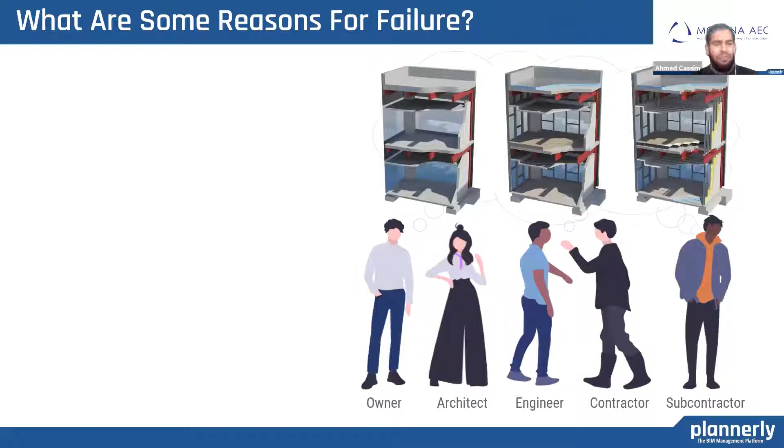So what are the reasons for these failures? Sometimes we don't have the right team. Expectations not aligned, bad communication before and during the project, deliverables not what we had expected, no quality checks, and then did not verify deliverables. So deliverables are not used - quite a few there.

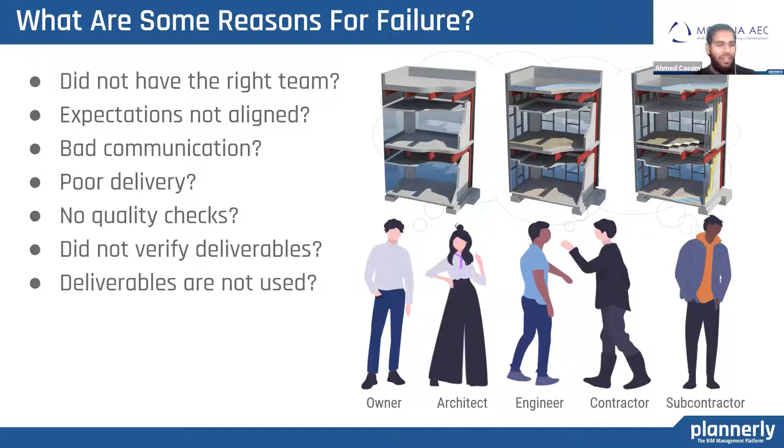So why is it difficult to align those expectations? Well, the first thing is we see a lot of bad communication. Here, firstly, is a poorly defined scope, just a one-liner, where we see just a request for some LOD and maybe COBie data. The second one is where we have the milestones, and the LOD is progressed through these milestones.

So milestone 1 is LOD 100, and then milestone 2, LOD 200 is expected, etc. And it just doesn't work like that on a project, and it should not be implemented. This is bad communication and should not be requested in this way.

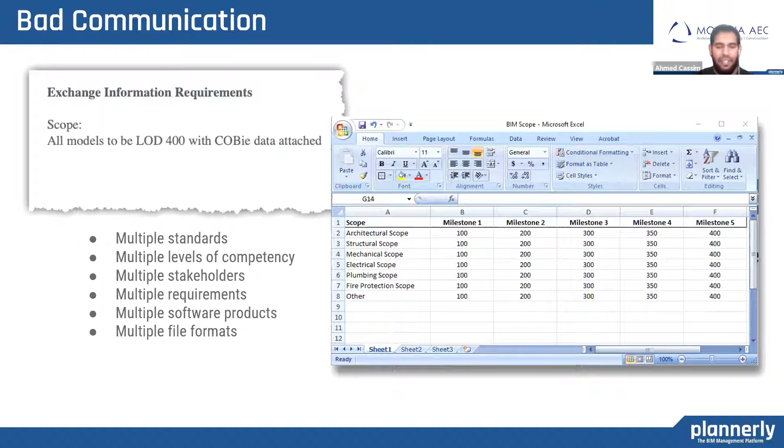There are so many variables that we need to consider, and a lot of standards out there are trying to fit all these - the level of geometry, the level of information, what elements to consider - into only a few categories. There's too many to simply categorize into just a number or a category.

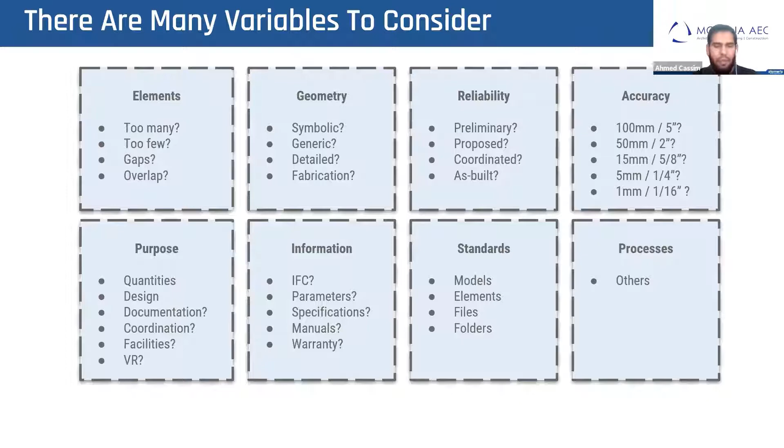And if you do get that all defined, people are so eager to start that they're just like ready, set, go. But unfortunately, without proper planning and without properly sequencing those events, you will end up with a bottleneck - you may have a lot of deliverables that need review, or a lot of issues at once that you need to resolve at the same time, and that gets very tricky.

And without proper quality assurance processes aligned, and without the correct tools to support it, we could be wasting a lot of time going through element by element, making sure they meet the initial requirements that we had agreed on. So this has two sides.

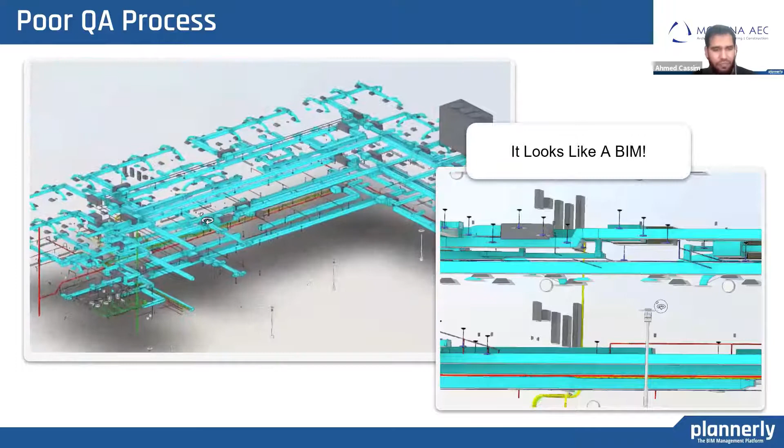It's not only the people creating the models, it's the people requesting models too. Are they both competent in their respective roles?

So it's very important to know the competency level of your company. Do you just know about BIM, or do you do BIM? Or are you an expert in BIM? Knowing where your company fits will assist you to not overcommit to something that might put the company in potential risk.

There are some great competency frameworks out there, and some great foundations to build from on your own. So we have competency questionnaires that people send out, where you can also have a mission statement, which is great - whether it incorporates BIM and whether it incorporates lean. This is where you can get a real understanding of what the company is about to achieve.

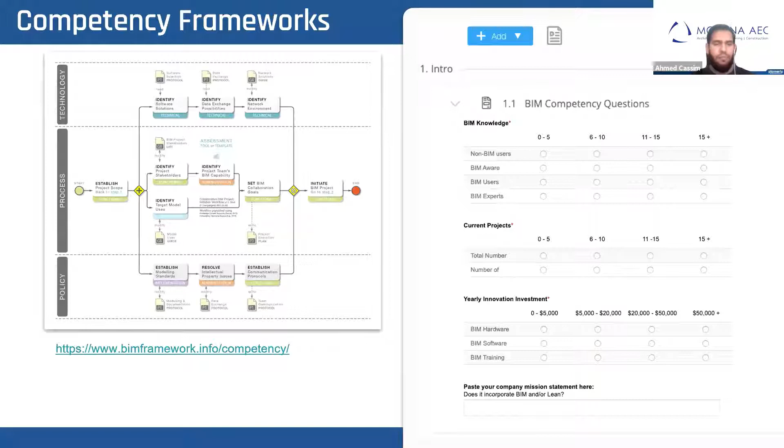Now let's look at what motivates teams for doing BIM. So each team has a different motivation for BIM. For owners - as an owner, I might have read about BIM online.

I might want to use it in my design reviews or to communicate with the public about what's going on. I might want to sell a property and market that through VR to someone in another country, or I might want to sell an apartment. I want to save cost in construction, or even to optimize facilities operations.

Alrighty, so then there's the architects. They want to win more business.

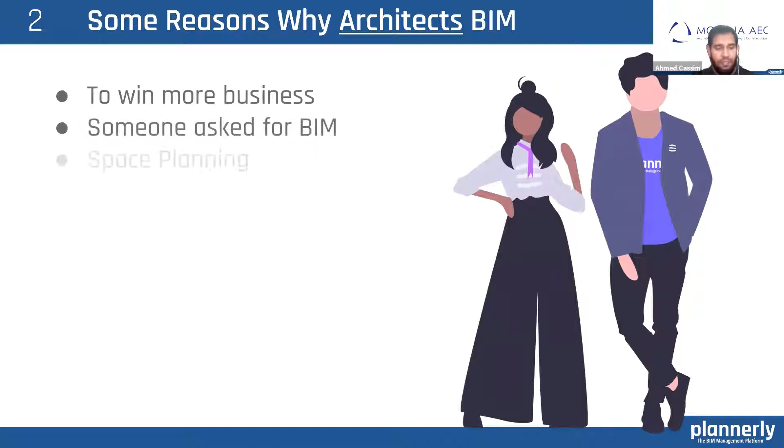Sometimes it's just because someone asked for BIM. They're going to do it for space planning, for design reviews using AR, VR between them and the client, design coordination, workflow efficiencies for construction documents. Like if there are apartment models that you can copy over, or you want to reuse that project, modeling a plan and splitting it with a section is much quicker than having to draw that section in 2D all over again. So the contractor might want to win more business.

Someone like the owner asked for BIM. It might be for coordination to reduce risk in the construction process, for quantities and estimates, 4D simulations, safety and phase planning. These are reasons why the contractor might be motivated to do BIM on a project.

As for the engineers, again, to win more business, or someone had asked. They too are part of the design coordination, but also for internal system analysis and for bill of materials, or they have a fabrication team on site and to track change orders.

And then we have these service providers. Someone asked for BIM and needs support on it. Well, the service providers are there to fill in the gaps within the scope. And maybe there's a need to accelerate the team's capabilities. The aim for these service providers is to improve our industry more rapidly.

So there's a lot of reasons around all of those. But in summary, it's when someone asks you to do BIM or to win business. And what gets us excited is when someone does BIM on a project to gain specific efficiencies in their workflow. Like for the architects, it's cutting sections into drawings more quickly, or doing something in 2D, but because you're using BIM, it updates in 3D, so everything else updates. For the contractors, it's for getting quantities or for estimating. All of those are key motivations.

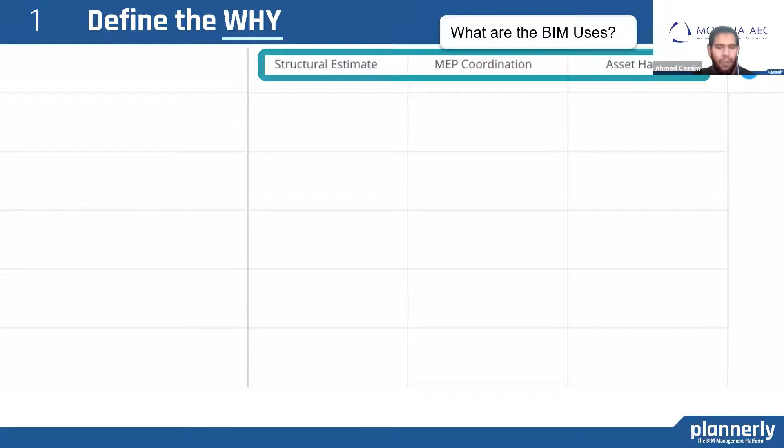Now, let's talk about the simple steps to take in order to get the right BIM. Of course, we need to define the why. Why are we doing BIM in the first place? What is the purpose? This will help us set up those major milestones in the project, which we can then define with scope, which is the what, the list of items. And then how much is required.

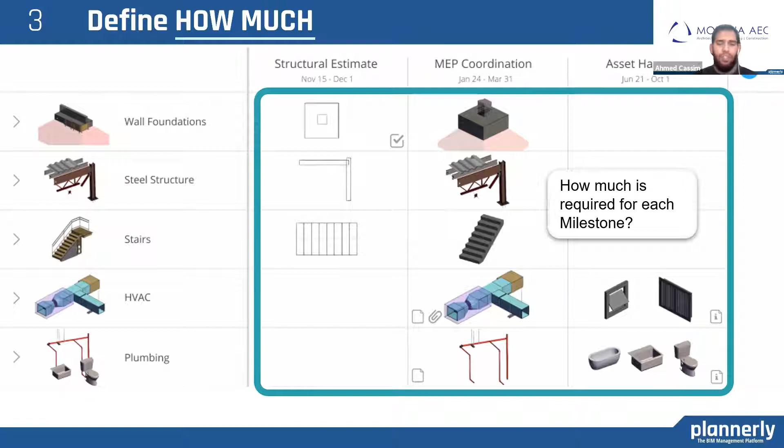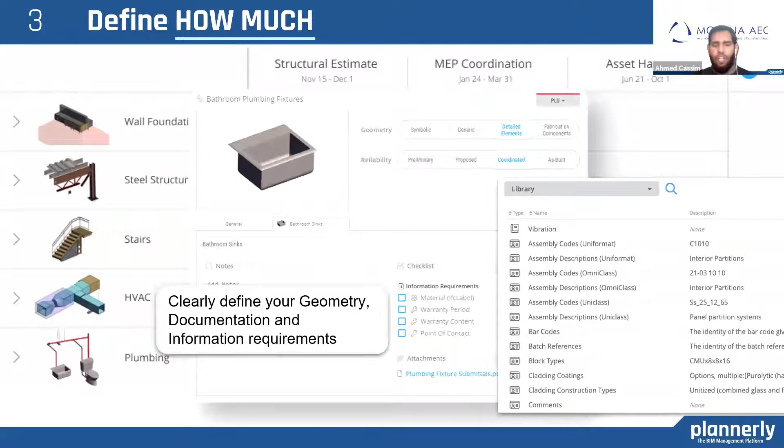So you want to provide the correct LOD, or the right level of geometry and information. So if something is needed in 2D, deliver it in 2D. If it ever needs to be in 3D and is asked for in 3D, then only should 3D be provided. Focus on when you need those elements and when they need to progress in more detail. Clearly define your geometry, documentation, and information requirements, and understand who is responsible for what information, especially at handover.

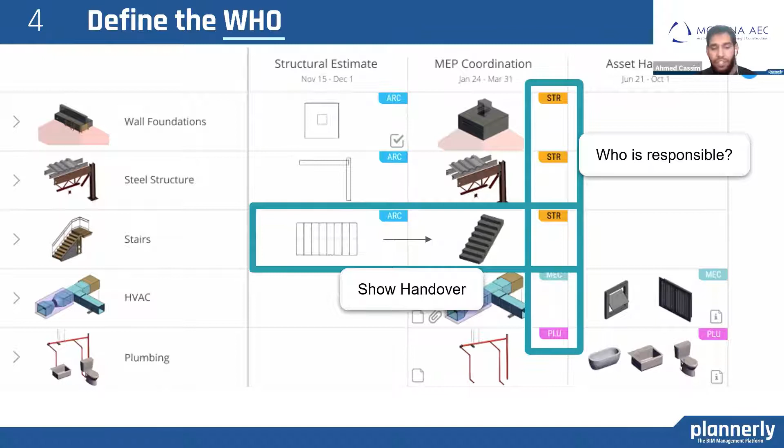So here we have stairs that are required only in 2D for a structural estimate by the architect. And then later on, the structural engineer was involved at a different milestone for an MEP coordination that was required in 3D. Always remember to keep it simple.

And then have an optimum delivery sequence. We've seen, as we saw in the previous webinar, a case study where there was a 53% decrease in issues based on being able to sequence the tasks for each of those information delivery milestones in an order that makes sense to the team so that there's less rework.

For example, a fire engineer won't have to model everything up front, or else he or she will have to move everything again later. He or she will have to wait for ducting to come in, and then the gravity plumbing, and then go ahead and model at that stage, so as to avoid remodeling and rework, because fire elements, as we know, can route around other things.

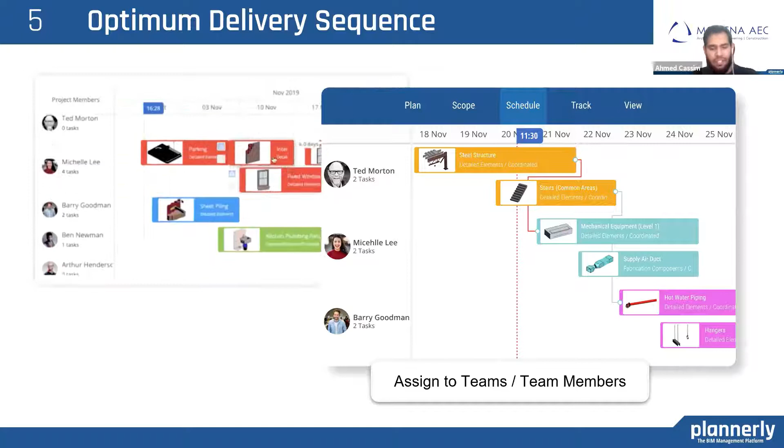So we discussed why some BIM projects fail. We talked about what motivates BIM teams, and we showed some steps to get BIM right.

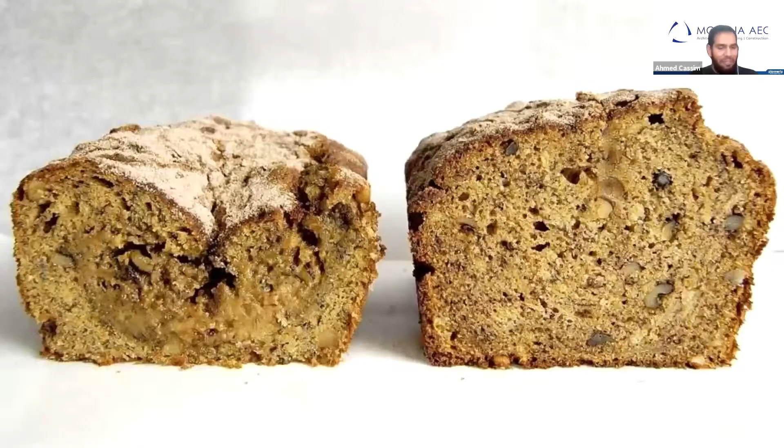And so we have the recipe, but is your BIM fully baked? So there you have it. You don't want half-baked stuff. That'll taste quite nasty. Imagine having a beautiful, fully baked BIM. How do you know when BIM is ready, when it's fully baked?

So we are given deadlines. And whether it is ready or not, it has to be delivered on that deadline. And we get a start date and an end date. And on the end date, there is a whole lot of things that need to be reviewed or need to be done. Imagine having to solve 100 clashes in one day.

But if we had bite-sized processes for our deadlines, solving those 100 clashes in, say, a month's time doesn't feel that bad. For example, you know what, let's get together, let's get first floor coordinated, and then move on to second floor. And once that is done, the next, and so forth. So sequencing, when you can deliver on a weekly or bi-weekly basis, is a lot more efficient.

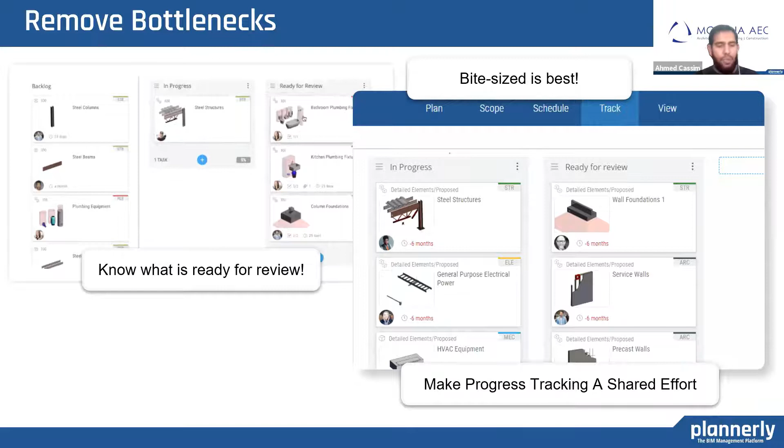And so using the Kanban board, as you can see, people can just drag and drop something from in progress to ready for review to show when they have completed it. It doesn't have to be the whole model. It may be just a set of elements that are ready for your review, and you will be notified about that too. Pretty awesome. So how to check?

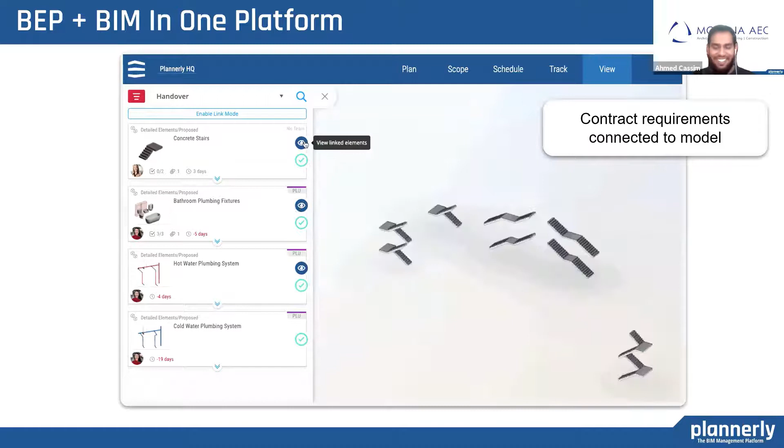Well, it would be great to have the BIM execution plan and the BIM requirements, the BIM scope, and the BIM deliverables all in the same platform. And imagine that it was all connected to the model. That would be powerful.

So imagine being able to explode the building, sort elements into these groups, which you can review. As if walking into a store and you walk through the aisle and lighting fixtures are to the left and all grouped together, and in this case, stairs on the other side, and then review the items without having to search for them separately within the model. What to check?

So if you had a set of information requirements, for example, going through the process to check whether geometry and information requirements are present and verify it before delivering the model to someone else. How do you then check the progress and BIM compliance? Usually it's just a checklist that you go through, and then you can see whether you are 50% complete, for example.

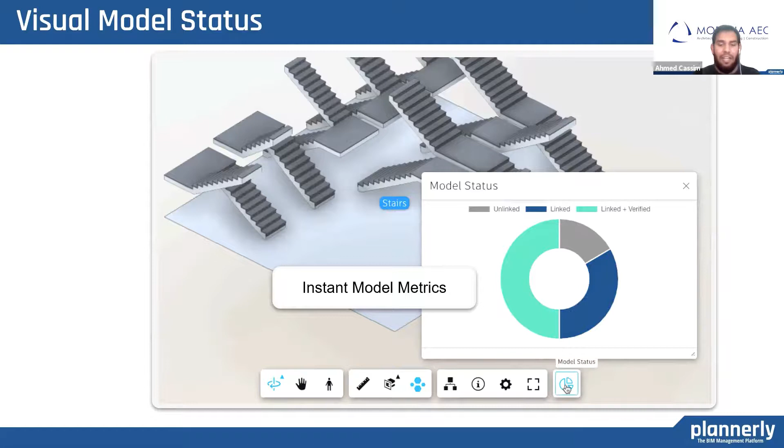But imagine if you can connect to your BIM tasks and BIM requirements and visually see the model and filter and hide what's been verified and completed every time you check off a task in the model. And at the same time, being able to see the model metrics and status instantly, imagine.

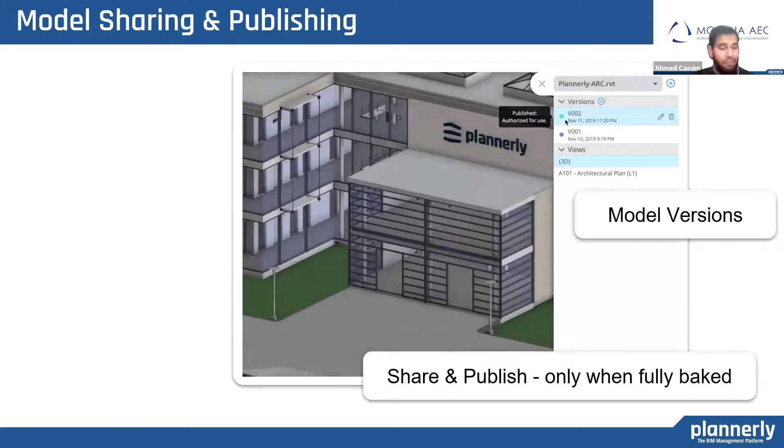And then how about making sure that when you have the model and that checklist is finished, that is the only time that you then share and publish that model. And the relevant people or teams will all get notified when things are verified and published, or fully baked.

So with regard to BIM compliance, it's really important to consolidate those requirements, making sure we have reviewed all our models against the checklists before we share and publish them. Always review before you share and publish.

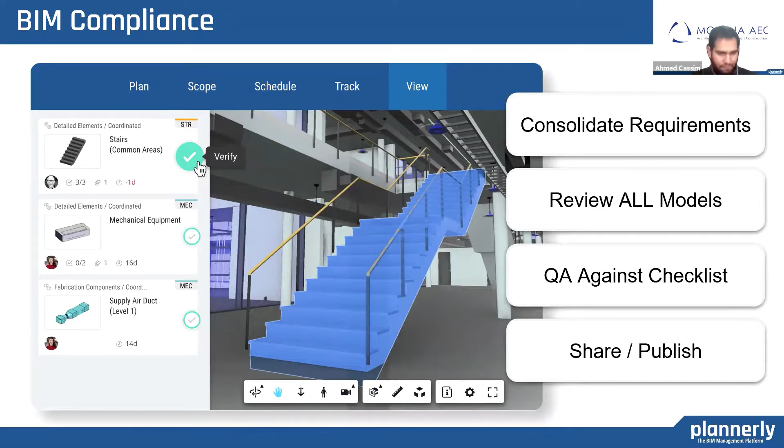So in conclusion, in order to get the BIM you paid for, you have to understand each team's motivation for doing BIM and why you are doing BIM. Seek competent teams that will be able to deliver what you would expect, clearly define information, delivery milestones, sequence, track, and manage the progress, have connected requirements and deliverables. Be able to visually review and verify, and publish only when fully baked.